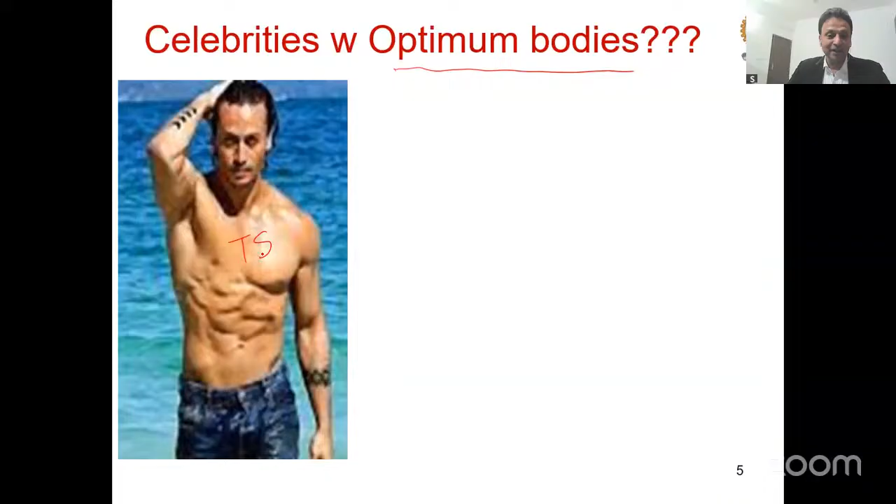So let us say in the beginning you have a heavy structure like this, which is a CNC machine. What I will do is start off with this material or loaded block and take away all the extra material. So extra material from which region? Wherever there is less stress. As you know, material is provided for bearing or resisting stress. So wherever more stress, more material; less stress, less material.

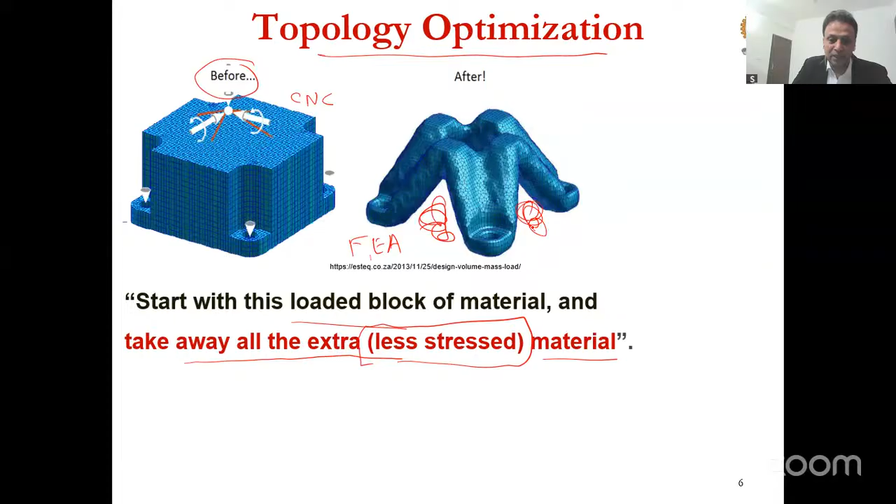So what will happen is I will do finite element analysis, which is a stress analysis technique, and find the stresses. So in this area, you will find that the stresses were low. So therefore, that material has been taken off. Let me give you another analogy, very simple, which I tell in the class also. All of us have these two arms, right? These are like cantilever beams.

Now, a cantilever beam is fixed or supported here and loaded here. But you see the cross section is increasing. And as you know, the maximum bending moment is at the support. Am I right? If I draw the bending moment diagram, if it's a point load, it's going to be W into L, where L is this length. Likewise, what I'm trying to say is, this is God created.

God has made you this way. Where? For example, your thighs have more fat out there, heavy out there.

But as you go down, they are thin. Why? Likewise, if you take a tree, the tree is thicker at the bottom, because all the load and resistance has to be borne at the ground level, and therefore as it goes up, and finally at the leaves, it goes less and less. This is precisely topology optimization.

So one more example I put here. Now let's begin with design. What is design? Basically all of us know design, but when I ask my students to define design, they are somehow not able to. The logic behind design is: find the material, find the size or dimension, or find the form or shape, for any given need.

Whether it is to resist torque or whether it is to resist bending, it all depends on the need. And when we say how do you decide that your need is met, it is when you have that factor of safety met, and that factor of safety is nothing but safety. So your job is done successfully or safely, whatever is the job.

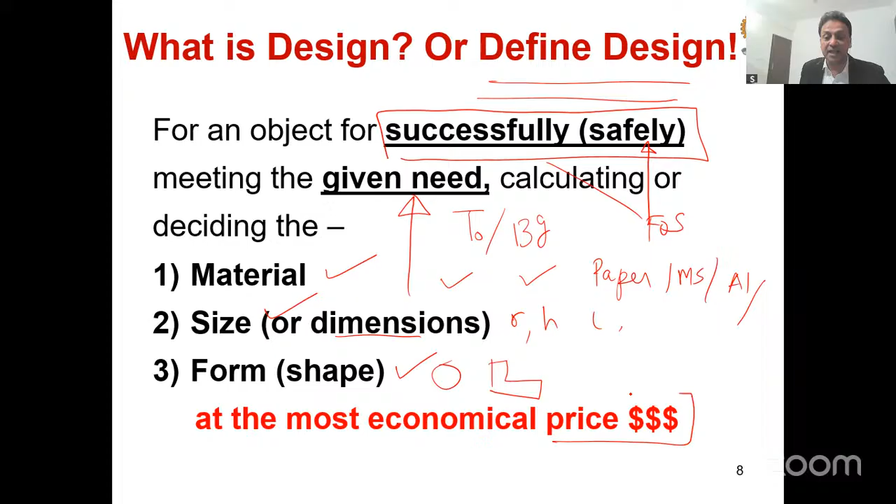And also please remember, your cost of design has to be low, but sometimes designs can be very expensive, so those are futile.

Now design today is all human centric, user based. A simple example, the best example, is your phone. Initially it was meant only to talk, not iPhone, just phone, meant only to chat or talk, just audio. But today the modern phone is all in one. It does calculator and photo and whatnot. I know less than you people.

So ultimately, the design has to be creative. Otherwise it will not survive in the market. You see this Apple versus Samsung, always there is the fight for creative design.

And then we also talk of safety. For example, the battery should not blow. It has to be green and recycling.

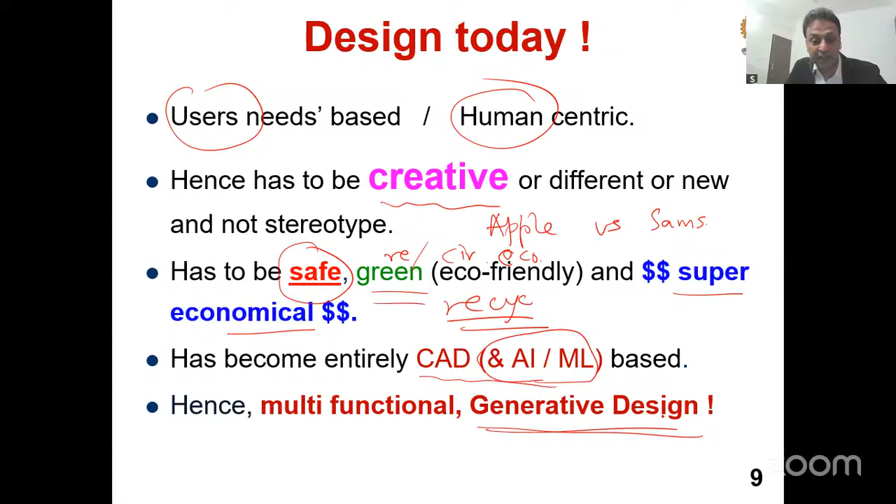Now let's see quickly some applications. The most common examples which you see around are automotive, whether it's a two-wheeler from Ola or Ather, or a four-wheeler from Mahindra, or the Audis and BMWs and all. Brilliant design, the exteriors are super good. I'm going to show you quickly at least 10 or 15 different examples.

Now, furniture, mobile phone, gadgets. In COVID, if you remember, we had masks. Initially they were just like a cloth, but designer masks started coming. So that was the creative part. And when you go for buildings, when you see a beautiful flat or building, you are impressed, etc.

Let's go ahead. So these are some quick snapshots, just please focus on the geometry part, the design part, the creativity part, the use of material, the optimization of it. So some buildings are shown here. That's your green building, where your AC load and light loads can be minimized. Wonderful, exciting area to research on.

You see, these aircrafts cannot carry any dead load. You want them to be as lightweight as possible. So our light combat aircraft, what we call Tejas, the name itself says light. It's a combat aircraft, it has to go fast at the enemy. So therefore you make it light, and you use carbon composites.

And this is a Sukhoi. That black color, have a look at the design part of it. These are stealth aircraft, reconnaissance planes that radar cannot catch, that's what this is.

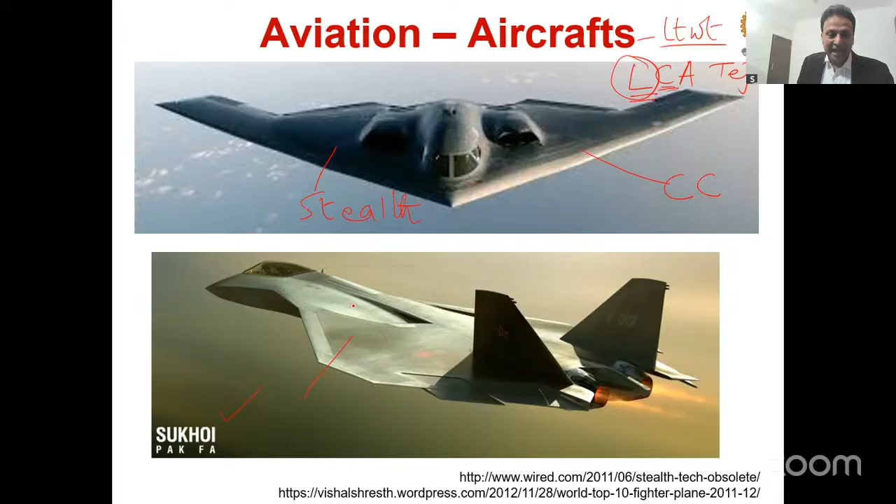And you see that bat-like shape. Okay, and likewise you see the beautiful shape of these Sukhois.

So this is going to be the future concept: lightweight, one or two person helicopter for 40 to 100 miles, going from Prayagraj to say Kanpur or Lucknow. Similarly, you see these cars, beautiful examples, all topology motivated, all lattice motivated, all generative design motivated.

So I'm not going to stick more, but have a look at the designs, those Ferraris and some beautiful motorcycles. This is just to motivate you for thinking differently. Take these cantilever beam designs, for example, the seat design is like a cantilever beam, so you have maximum weight sitting out there, the back person, and yet it is safe to run.

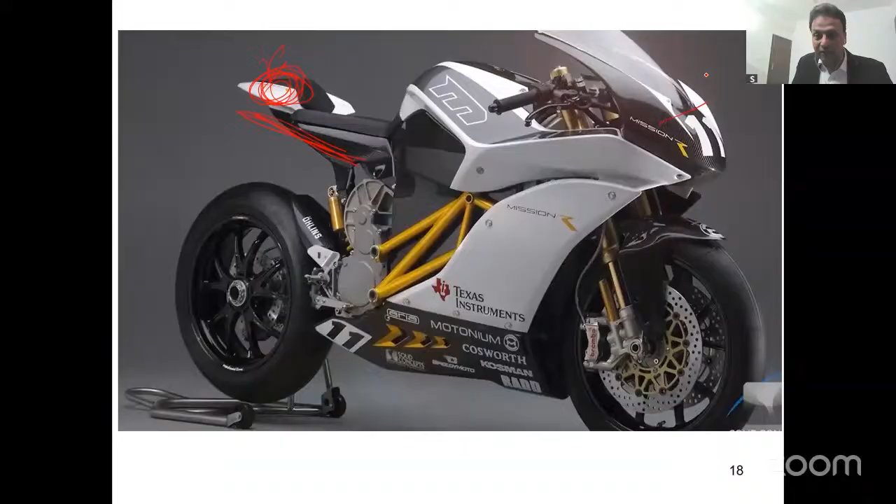And there you have all your carbon fiber composites there and there. Similarly, few more examples of motorcycles, because many of you are youngsters here in the crowd. That's another motorcycle, another, and there an Audi motorcycle.

Wooden bicycles. You see, you go to Netherlands, you see the CEOs and CTOs of different companies, even the president, prime minister of that country, ride bicycles.

And you see, this is like a material. I said design, and design, one of the aspects is material. Now this is wood, but you see the cross section, this is not circular cross section, this is like a rectangular, and if I take a cut, you can get. So that is just like a small project which people can do.

And even in India, this was by a gentleman in Tamil Nadu. He went on to make a wooden bicycle, a bendy bike, for example. Now if you want to travel in train and take this bicycle, there should be an option of bending it and making it half-sized, and so on.

So CAD wise, you can explore all these. Let me quickly show you this just to motivate you further. I'm sure you have seen this Google self-driving bicycle. This is from Google. Let me just show you.

So this is not AI, this is not an AI video, it's an old video.

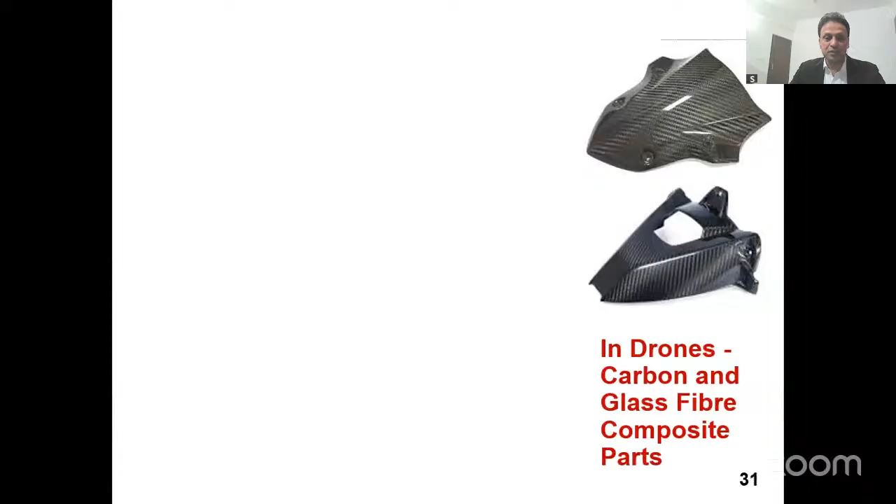So let's proceed. Now Vande Bharat, for example, and drones are using all these carbon glass fibers. So it's all design motivated. Have a look at this.

This lady is using an iron board for ironing clothes, but the same board can be having a mirror at the back. So once you iron your clothes, you quickly drape them and wear them, and see this. So this concept is called multifunctionality. Multifunctionality is nowadays a big thing in design concept.

So let's move on to manufacturing, because I'm ultimately going to cover additive manufacturing. Now people are talking of Industry 4.0 already, and Indian industry is slowly waking up. I was recently at HAL in Bangalore, LCA division, but they have still not adopted it. I was speaking to one of the industry based experts as to whether they are using it, and they said no.

However, the world is advancing very fast. People are even talking of Industry 5.0 and 6.0. I don't know how many of you are aware, I have a couple of slides to cover just to tell you.

Now please remember, Industry 5.0 and 6.0 again are human based, and therefore it has to be flexible. One of the subsets which is used is 3D printing, all of us know, but people are already talking of 4D printing and 5D printing. So may I request all of you to at least catch up on some terms for knowledge sake, rest all is known to you.

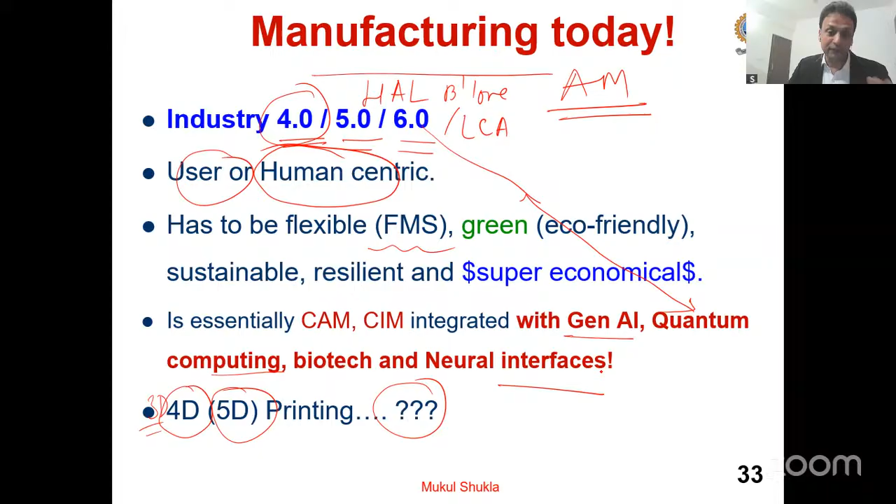Please remember cyber physical systems, all your machines, from design office to the supply chain, are all linked by internet. So that is the commonality. Quickly covering Industry 4.0 elements, you see systems are integrated over the web, IoT is used, cloud, the servers are no more sitting on your desktop.

They are over the cloud - robots, autonomous robots, big data. Data is like wealth today. Loads and loads of data is getting generated, and that is where one of the elements is sitting, additive manufacturing.

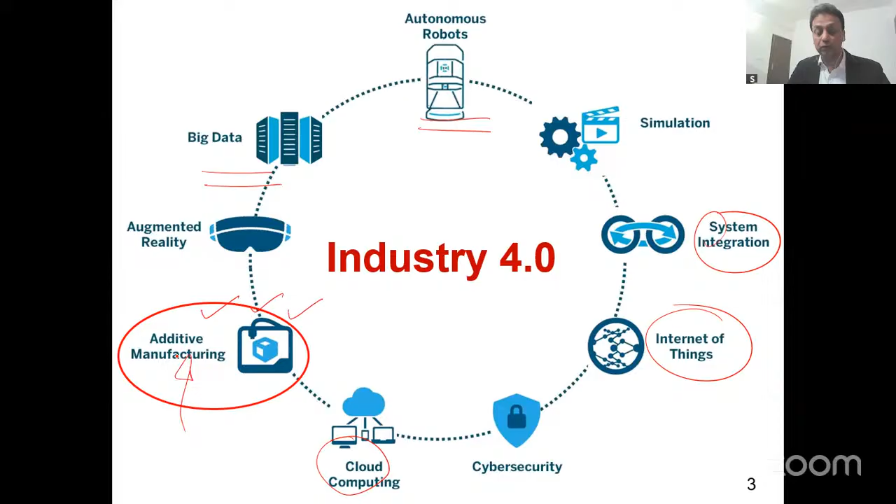More details are already known to you. You may please see - smart factory robotics with additive manufacturing. Industry 5.0, as I said, after COVID, this is human-centered. So I have put a quick difference between Industry 4.0 and 5.0.

Let's see, for example, how many of you are aware of this word called digital twins or cobots? Please write, keep writing in the chat box. I want the chat box to be flooded. Naveen ji, Rakesh ji - yes sir, some of the teachers are writing. Please write, otherwise when we go to the class, we expect the students to interact and speak and be lively, and we teachers too, no matter whether you are on the mobile. Okay, please keep writing.

What I was saying was this circular economy and waste reduction. So you cannot have a technology which is going to pollute your Ganges or Yamuna - not allowed. So Industry 5.0, if a company in Naini is going to adopt Industry 5.0, they just cannot pollute Ganges. Likewise, modular production and the use of AI are always there. So I'm differentiating 4.0 with 5.0, and 6.0 may bring more and more sustainability issues and environmental standards being enforced on the industry.

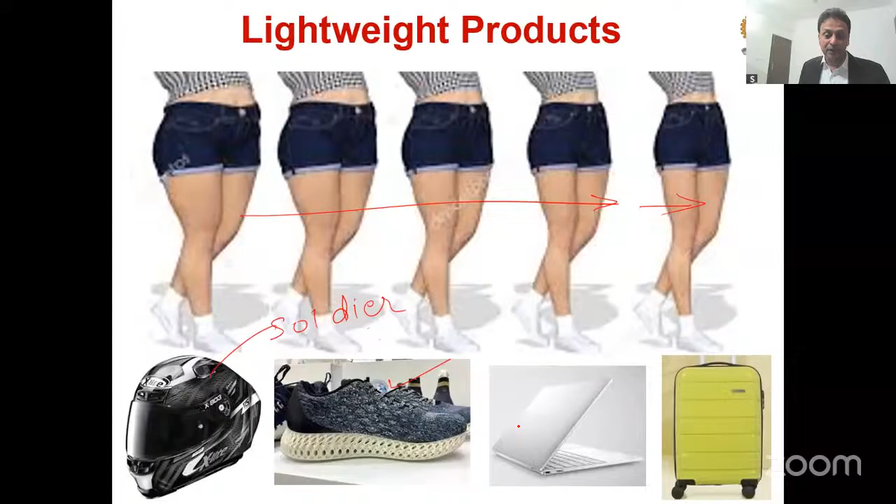So those are examples. Now, when we talk of structural optimization, there are three parts: one is called size optimization, the second is shape, and the third is topology - and this is going to be the talk today. As you know, size - for example, a rectangle whose length and height are there - and I change the L to L1 and H to H1, it becomes a new size. So it is an optimized size.

Likewise, in shape, this is a rectangle and it is made into an ellipse type - that is what we do. For example, a T beam, if it is converted to an L beam or an I beam, is nothing but a change in shape. But we are talking about topology optimization.

Analogy - if you are reducing your weight and dieting and you are lying in bed saying 'sir, I have absolutely no strength now' - that is not allowed. So you have to be equally strong, you have to be more agile, you have to be more efficient.

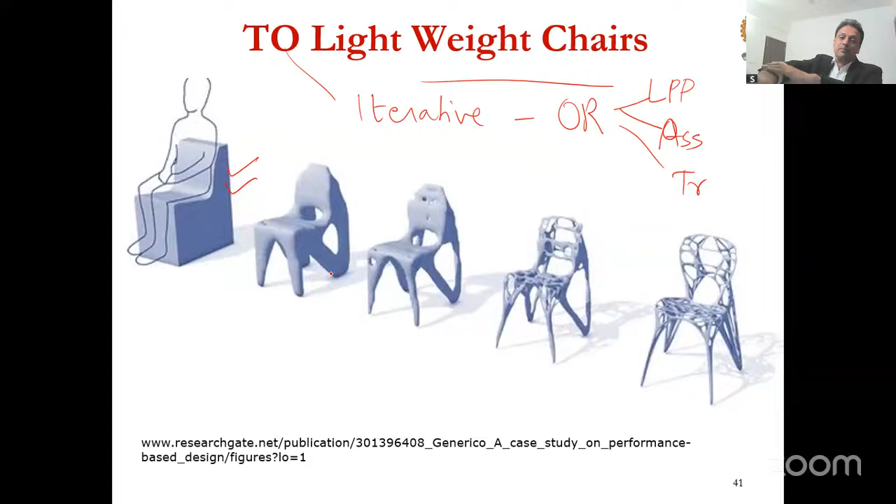If you remember, we used to do the first iteration, then the second, then the third, and then stop somewhere when it converges. So likewise here also, this is my initial chair, which is heavy. Now what I'll do is start taking out material. I'm biting out material from which area? The area which has less stress. I gave you the analogy of my arm. Likewise, you see that all this under-stressed material I'll take out, and next iteration and next and next. So you end up with a sleek design, a wonderful design like this.

And please remember, as I said, functionality. For example, this person who is sitting here safely, maybe the factor of safety of this was 7. It comes down to 5, then 4, then 3, and then 2.6. So this factor of safety should have been above 2.5. The same gentleman who will come and sit here, it will not break. This is the objective of topology optimization. A chair like this, a table and chair like this.

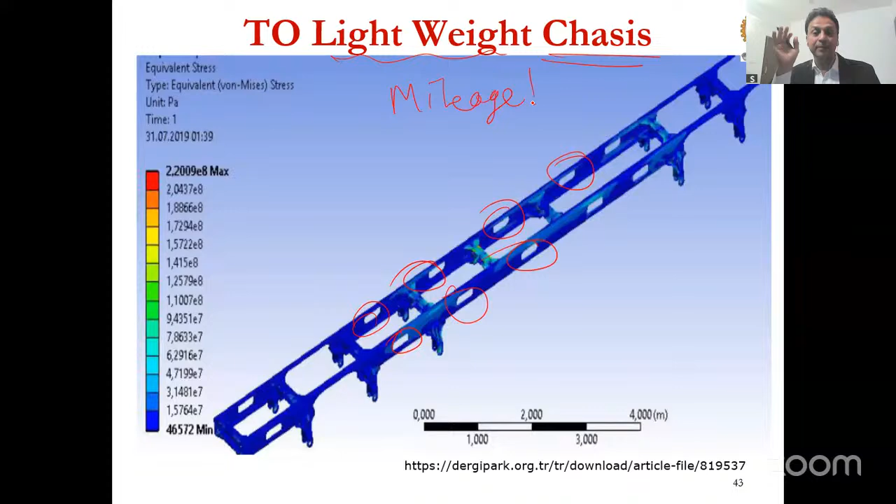For example, chassis. We all see chassis in all automotives, all e-rickshaws and wherever. But you can have those types of cutouts to make it a lightweight chassis. And any lightweight chassis will give more mileage. So this is the motivation of the talk in additive manufacturing. I'm going to tell you why. So those are some examples.

Now, one thing you might have observed from this or this is that the designs, the shapes, are getting pretty complex. So let's see one more application: this is an aircraft. Many of you might have traveled by air. You see, this is like that wing. So you have one wing on one side, there is your fuselage, and the other wing is there. This wing is like a skin basically. You see, this is called skin somewhere here. Yes, skin is written. So the exterior which you see is a composite skin. But skins are not rigid or they are not stiff enough.

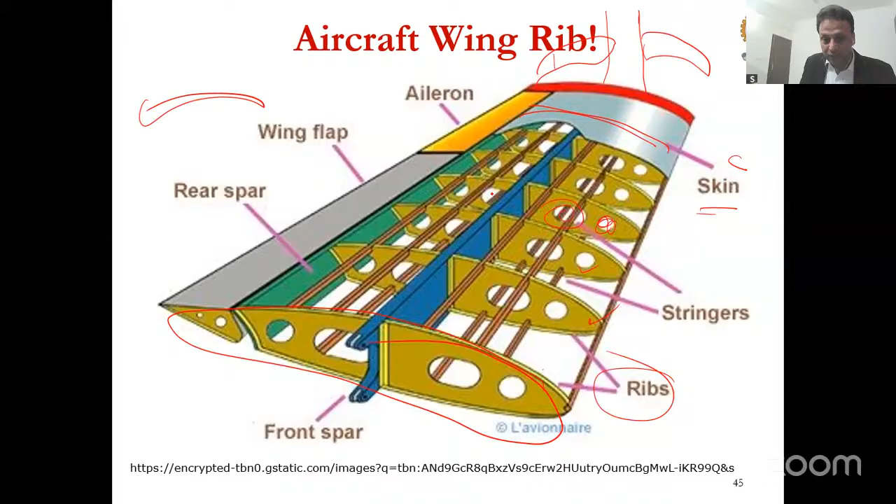So what do we do inside these? We put ribs like these. You see them. And then material is cut out. You see those holes. So this is that example of an aircraft wing rib. Initially what you will have is all solid, full. Then you will start taking out material iteratively, first iteration, second iteration, third, fourth, fifth, sixth. So you will end up with a very light rib. And please remember, its job, providing stiffness to the wing, will not be compromised.

So now let's move on to the nitty-gritty. I'm not going to tell you the mathematics. There's a lot of mathematics behind it. Please remember, as I said, this is finite element based. Many of you might be aware of finite element. So at the heart of it is all a finite element based concept. So now, what is optimization? Many of you do know it. For example, there is a function which has to be either maximized or minimized.

So actually, optimization in real life is what we call jugaad. We learn that jugaad from our own minds or from those around us, right? But in strict mathematical terms, it's going to be a systematic method. For example, you have studied differential calculus. You'll remember: you find the first derivative, equate it to zero, find the second derivative, and the sign, whether it's plus or minus, gives you the minima, isn't it? So it's a systematic process. And there is a constraint also. Let me demonstrate by means of an example what optimization is all about.

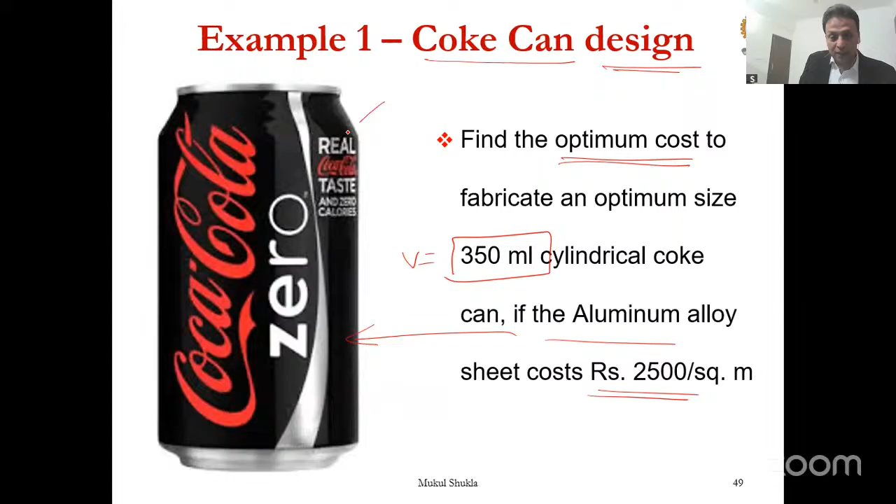So let me demonstrate how it is. As you know, in a cylinder you have two variables, radius and height. So here the height is more, the radius is less, versus this on the right side, the height is less and the radius is more. Please remember, volume has to be constant, 350 ml or 1 liter bottle or 2 liter bottle. It is constant. So let's solve it.

So as I said, the constraint is volume, pi r square h. It's a cylinder. Pi r square h is equal to 350. So h will become 350 upon pi r square. Why I'm doing this is because I want to convert two variables, radius and height, to a single variable problem by substituting it.

And then my objective function, as I told you, is like a sheet metal. You have to bend it like this and use it like a cylinder. So this is the surface area of a cylinder: 2 pi rh for the curved surface, pi r square on top, pi r square at the bottom. So pi r square plus pi r square is 2 pi r square, and 2 pi rh. So that is my surface area.

What is my objective? My objective is to minimize the surface area. What is my constraint? The constraint is volume.

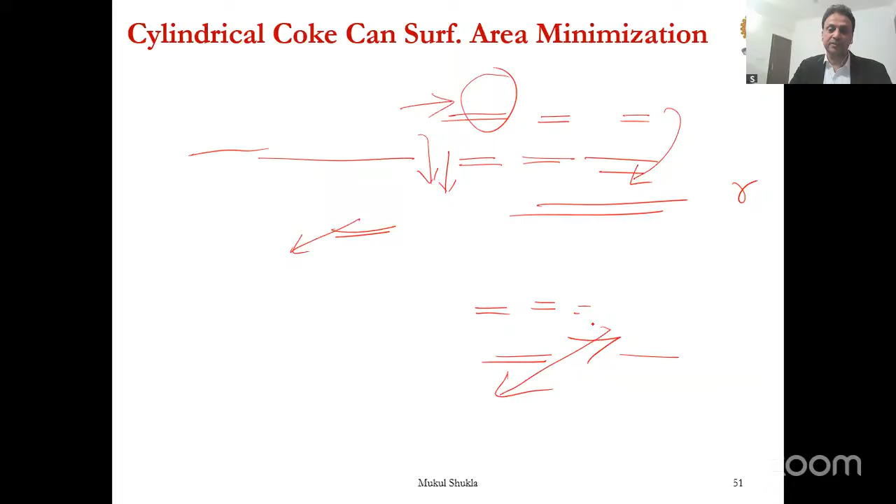But when you plug it back, you will find that the dia and the height are equal. So neither will your design be like this, nor will it be like this. You will in fact get a square shaped can whose height h is equal to dia. So this is that simple optimization exercise which I am trying to showcase.

Why? Because in topology optimization also we will use a constraint. We'll have an objective function. We will have variables. We will not do this differentiation, etc. Instead, we will use the finite element method.

Is it fine so far, Dr. Naveen? Any comments? Yes, sir. Fine. All right. Okay. Right.

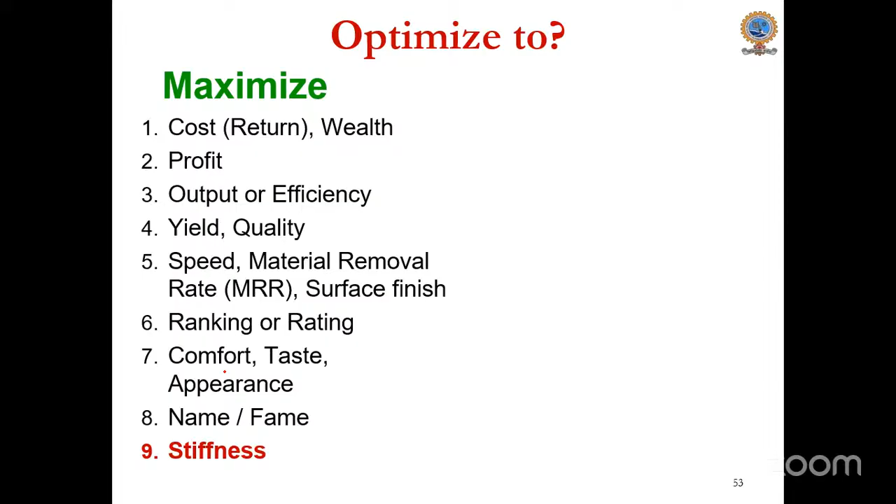Let's move on now. When we talk of optimizing, what do we want to maximize?

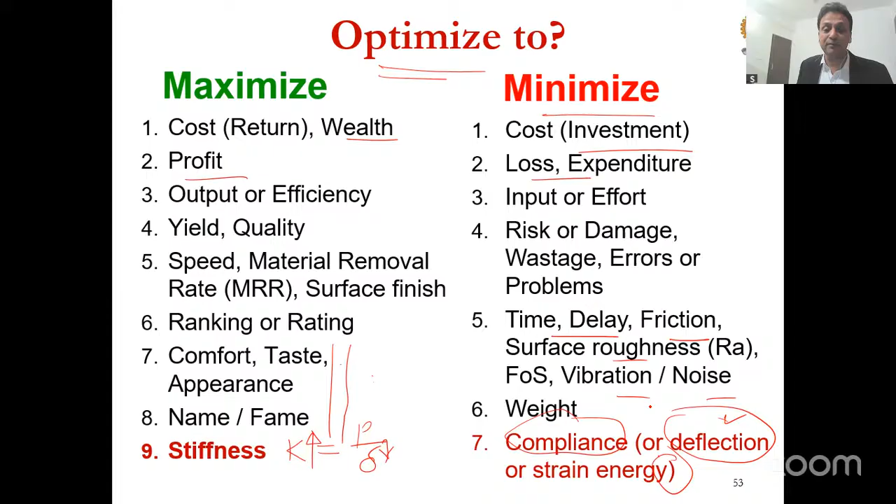So you want to minimize compliance, maximize stiffness. However, we will use the strain energy. Strain energy is the energy under the stress strain diagram, and strain is nothing but deflection. So we want to minimize strain energy. We want to minimize deflection in topology optimization. So I hope you recall this. This is what we will do.

I hope you also recall this, for the benefit of all those of you who joined late, because I can see the ting, ting coming. It means people are still joining.

Okay. Right. So what we are trying to do is make it lightweight. Why? Because it will become multifunctional, cost will reduce, manufacturing will become smart. Now, the obvious question is, how can you make anything lightweight?

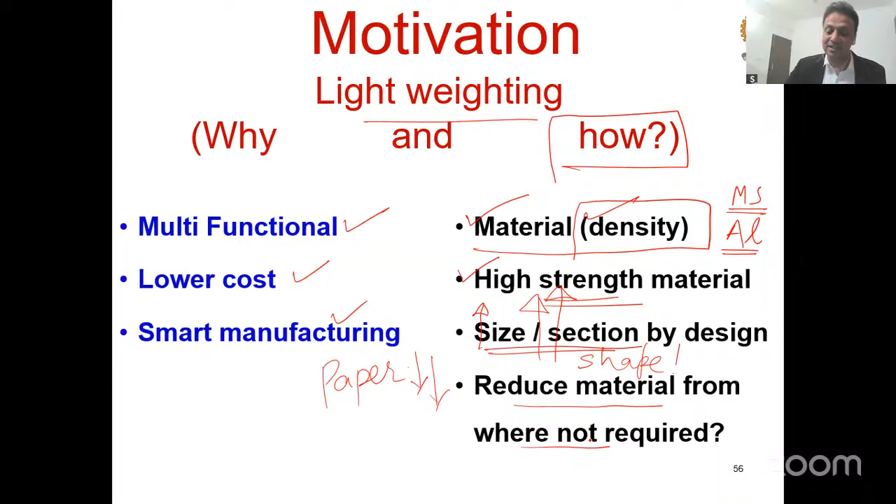Let's see now. Let's go slowly into topology. Now, as I said, I want stiffness to be maximized. I want deflection to be minimized. So let me tell you a simple example of a cantilever beam like this. Now I am dividing it into a 5x2 grid. So I have 5 columns and 2 rows. So it makes it 10 cells, isn't it? 5x2, 10 cells. But I am only allowing you to place 7 cells.

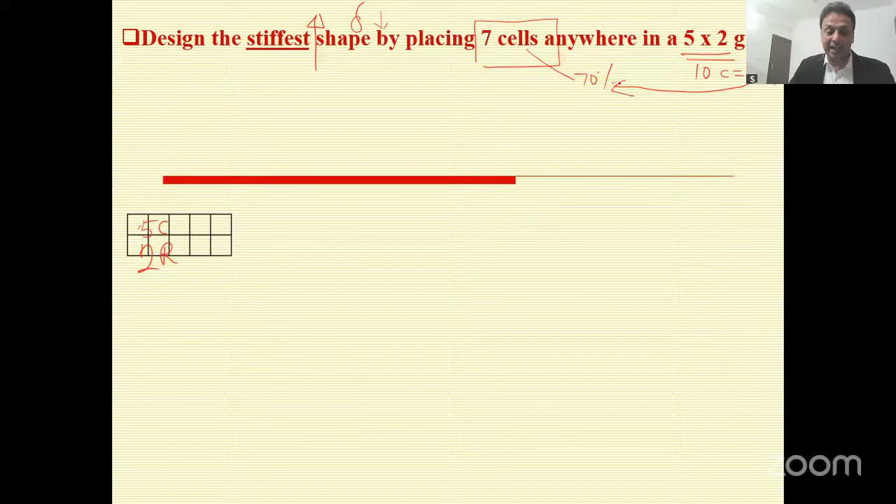Don't worry, it will be clear in the immediate half a minute. I am only giving you 7 cells. What it means is 10 cells is equal to 100% weight, and 7 cells means 70%. So I am reducing my 100% to 70%. But how? Placing the cells wherever you want. So let me start off. When I have 10 cells, I'll have 100% volume, something like this.

See this? Now, when I say reduce the volume or reduce the mass by 30%, from 100, bring it down to 70. So it means instead of 10 cells, I will give you only 7 cells. But the choice you have as a designer is put it in any location, the way you want to locate it. So let me show you. For example, I put 2 on the top and 5 on the bottom. This is one structure. I put 5 on top, 2 on the bottom.

This is another structure. So now if I put a point load there and fix it there roughly, same fixing again here, same point load here, the deflection of this is different, the deflection of this is different. So likewise, placing the material at different places will give you different structure, and when you load it, you will get different stress. So redistribution of mass, redistribution of stress is nothing but topology optimization.

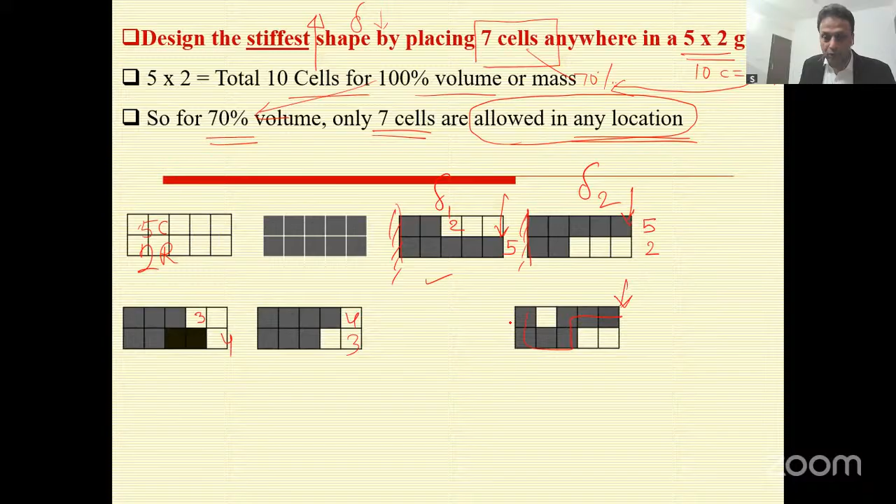Like another example, I can put 3 on top, 4 on bottom, 4 on top, 3 on bottom. So actually, I can have a fancy shape like this also and put the point load there, fix it here. But what it means is I'll have actually 10C7, making 120 possible designs I can make.

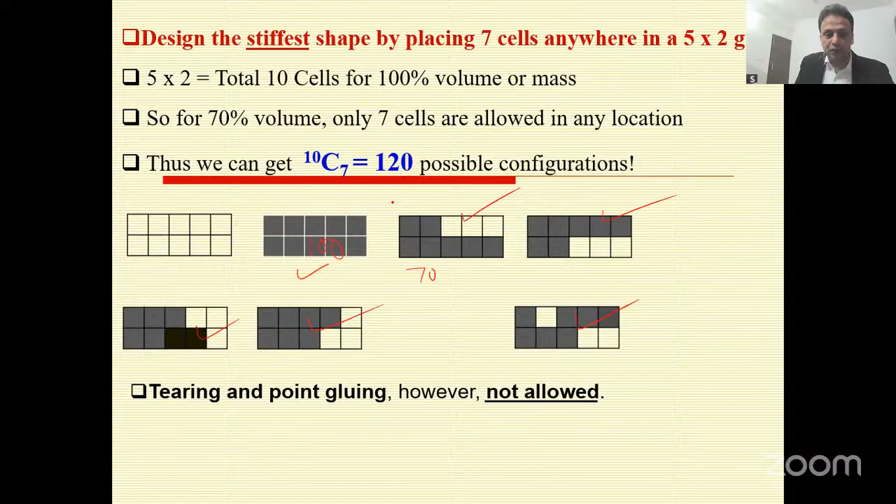But one of them, say number 75, is coming out to be the stiffest. So that is what we have to check for.

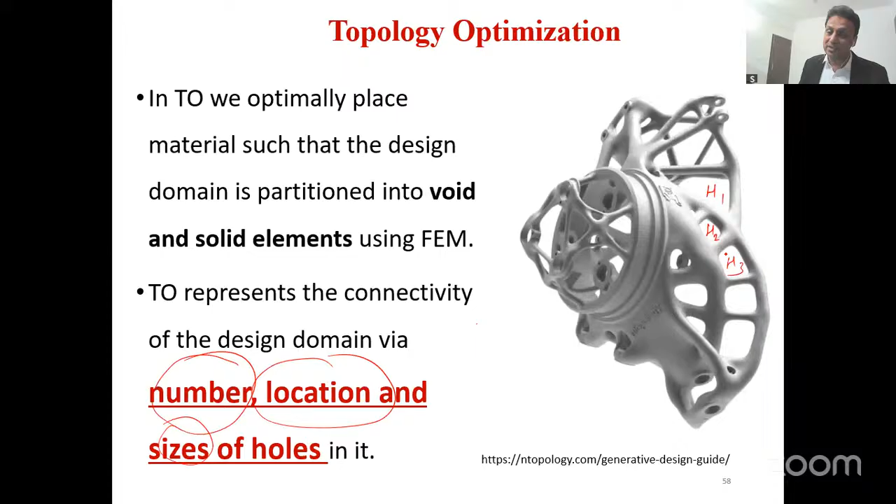अभी मैंने आपको example दिया on a beam, 120 possible configurations. So different topology. This is the meaning of topology. At least all of you should understand what is the meaning of topology. The meaning of topology is basically around connectivity. So how are you connecting one area to another? Say the left part is connected to the rightmost part. How? By these holes. तो कहीं से हटाया, कहीं लगाया. How do you control the number of holes, the location of each hole, and the size of each hole?

Why are we doing finite element? Please tell me, why are we doing finite element? To evaluate the stresses at different points as per the requirement. Absolutely correct. 10 out of 10. Yes, right answer. हमने कहा कि somewhere you have more stress, somewhere you have less stress. But how do you know it? To get an estimate of which of them.

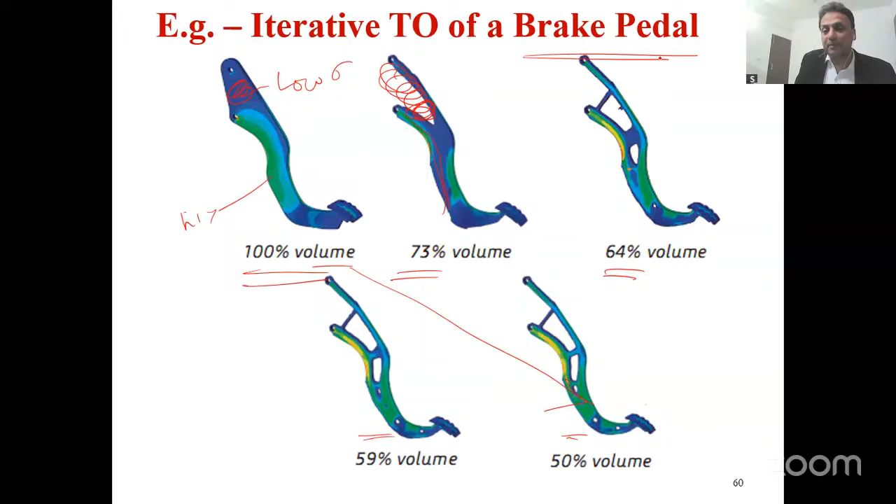And as you can see, what is the advantage of making, why do we want to make brake pedal light? Why do we want to make it light?

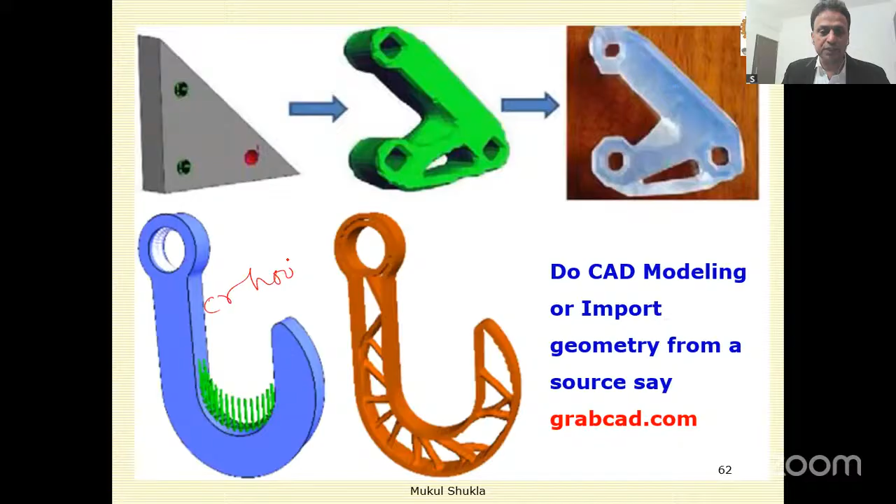I'll skip this. So those are some examples. This is a crane hook. You start off with that, and when you do topology, some shapes are getting generated. So not everything is so easy. The problem is you get some very complex shapes. And please remember, as I said, design on a computer is very easy, but ultimately it has to be manufactured. So all these complex shapes ought to be manufactured. Now, I've shown you some very fancy ones, I'll show you a few more.

Well, they're very difficult to manufacture, whether you have to use welding or casting or CNC machining. It becomes very challenging. So therefore, the savior or rakshak is additive manufacturing. As you know, additive manufacturing is moldless, die-less. You don't need a mold, you don't need a die. If you can conceptualize the design, you can print it. This is the number one advantage of additive manufacturing, that any design, howsoever complex it is, you can manufacture it. So let's see.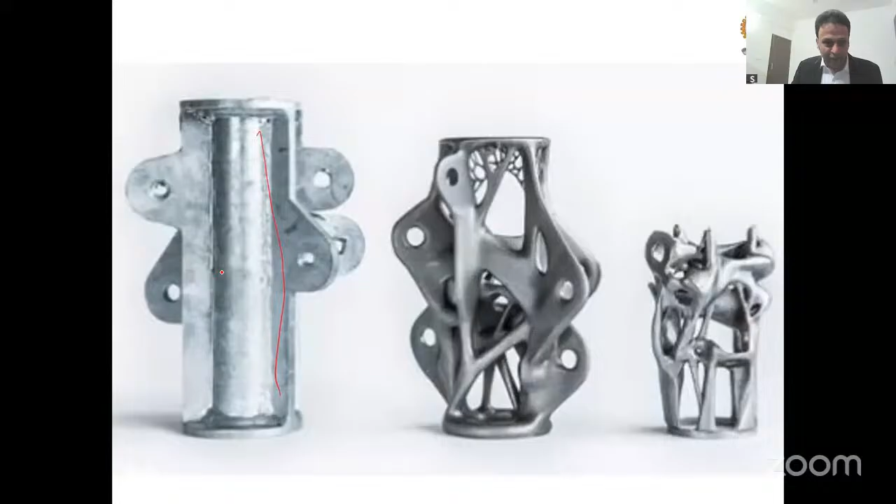For example, this is a classical example which is shown in additive. You browse topology optimization, you will get it. You see, this is brazing or welding done here. So imagine there are 5 parts or 7 parts, but you can additively manufacture it like this. And you can see all those holes cut out there. I told you the location of holes, the size of holes. So such complex designs are easily manufacturable by additive manufacturing. Conventional welding, CNC, or a hybrid technique is not so feasible. So that is one of the major industry-based delays on the adoption of topology optimization.

So slowly people are using it, because, for example, this is made of, say, stainless steel. Now if stainless steel or titanium is there, making it using 3D printing, you need a metal printer. Now, even MNNIT in Allahabad doesn't have a metal printer. So you do a brilliant design, I can do it using Abaqus, but I can't manufacture it. So this is the biggest limitation as of now. You come up with a good design, which is highly lightweight, functionally good, but you're not able to manufacture it.

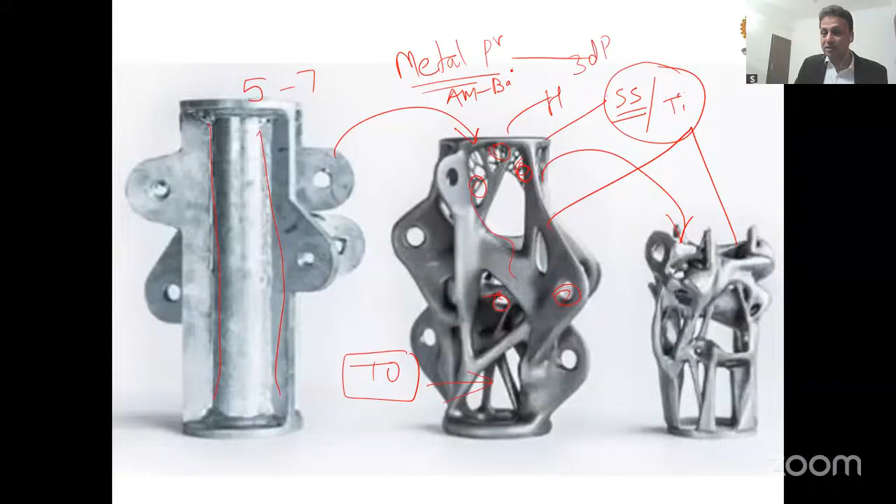And as you also know, additive manufacturing is a batch process. You can't get, say, thousands of products out of additive manufacturing, but this is where the world is going to be. So I'm showcasing some of the examples. This is an exhaust manifold out of metal additive manufacturing, and see the complexity of this object. Another seat bracket.

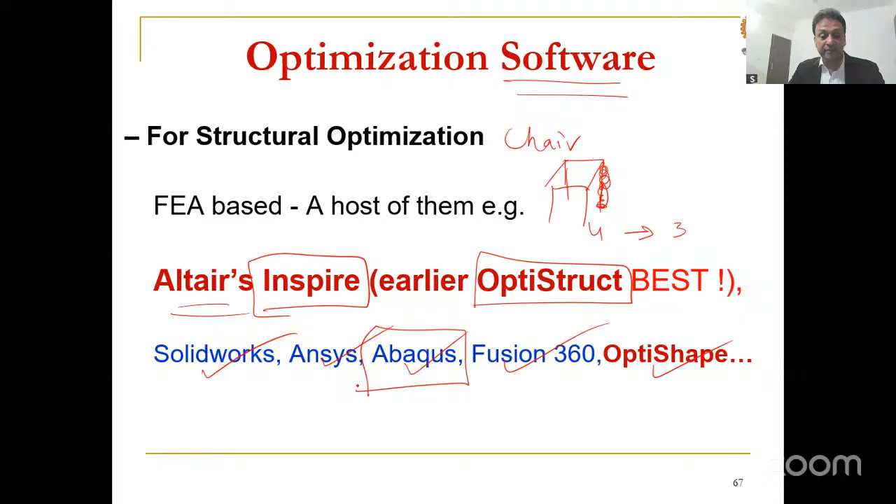Now, as I said, remember the ANSYS brake wheel example? The first thing we did is static FEA. Why? To get an idea of the stress, a trend of the stress. Once you get that, then you start.

Now moving back to this example of a con rod, what I will do is divide it into a design area and a no-design area. This no-design area we also call freeze. What is the meaning of freeze? Freeze means don't disturb. As you know, this is a connecting rod, connected like this. So I will demarcate this big end. What is shown here on this side is the small end - I won't disturb it. I will call it the non-design area or frozen area.

However, this middle portion which you see, I will eat out material from here, to make it lightweight - but from which area? From this central area. So you have to have some idea of your problem. As I gave the example of the four legs, those legs will be made tapered, but they have to be there - at least 4 legs have to be there. So you have to divide your model into design and non-design areas. This will be clear in the later slides also.

So let's now go towards the Abaqus optimization, how you do it. Remember the Coke can example? That's what we'll do here too. We will do topology optimization - shape and size we are not doing, although it is possible. We will have variables, like radius and height were variables in the Coke can problem.

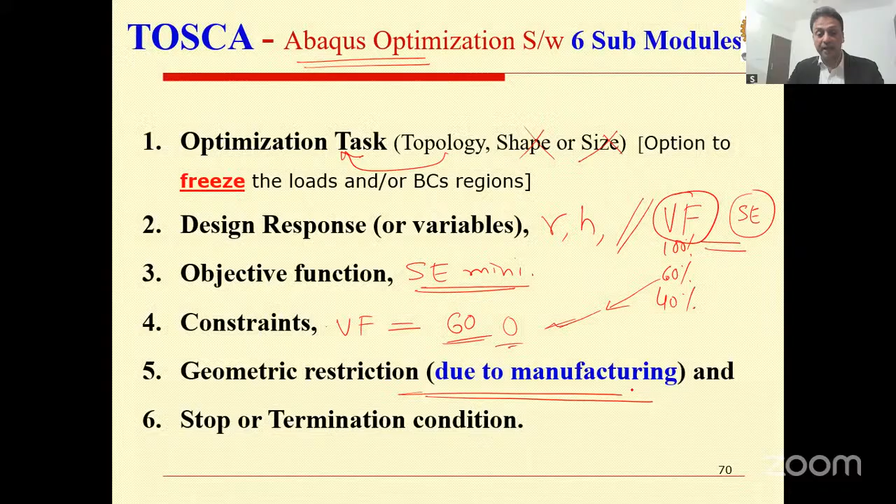Now this is the first example, picked up from that YouTube video from Abaqus. This is like a bridge - the one near Naini that you must have seen. So cars are going from Prayagraj towards Naini. This is that initial shape.

My objective is to minimize deflection for a 30% volume constraint. So what happens is start from 100 and decrease by 70 to come down to 30. You will just now see - brilliant. I also have it, I'll show you.

First thing you need to do is define the design or non-design area. This yellow area you see is where you will take out material. But this green area we have kept as non-design, because if you create potholes here on the road, how will the car run? So that bottom area on which cars or lorries will run, I have kept non-design - don't touch it, the green area at the bottom. However, you are free to play with this other area.

What I'll do is the first step, as you all know by now, is to do static FEA. Why? Because you will get an idea of the stress. The output will be the von Mises stress, and you will get a trend.

Now, as you know, this blue is the minimum stress - see, here there is no stress, here there is no stress. Okay, and you know this is like a simply supported beam - you see this, it is supported here. This is the bridge, it has supports here. So the maximum stress is coming at that red-yellow area.

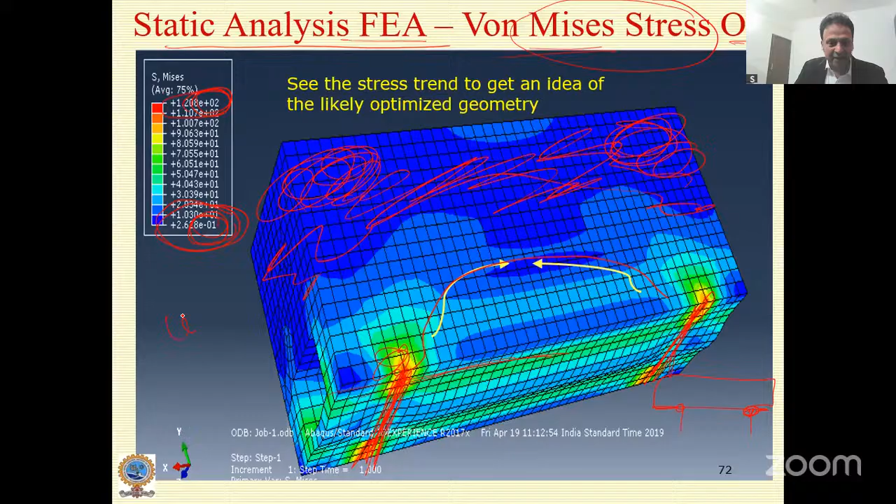So this is the end result. The link is given there - you can see it's a 35 odd minute video. So how did we start off? We started off with a block like that, a heavy block like that.

So this was that non-design area, the bottom road area. You can see there are no cutouts here, no holes here - the road is nice and good. But all the rest is the cutout, all topology - all this area is all eaten up.

All this area, so your 100% becomes 30% over a period of time. Is it clear, guys? Yes sir, it is clear.

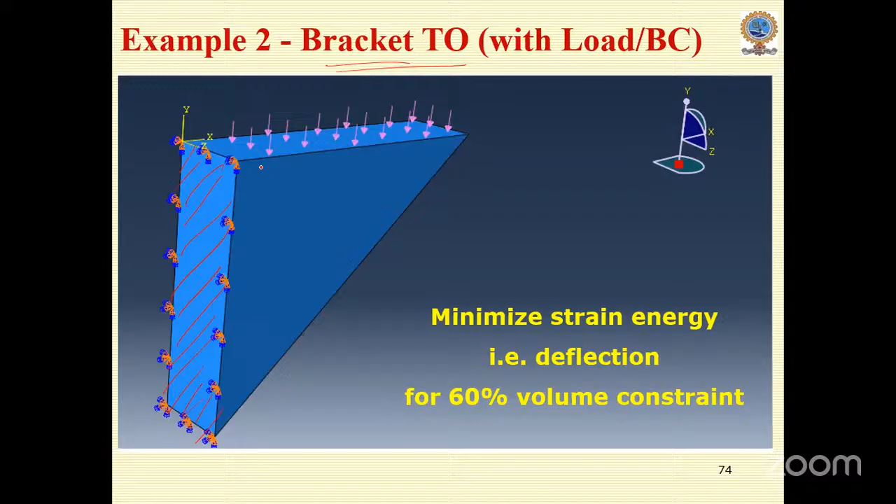Okay, so this is a 3D example I gave you. I'll show you another example. This is a simpler example of a bracket. I'll demonstrate two examples. So now this is like a bracket which is fixed on the left end, fixed in a way. And I'm having load, like a pressure load on the top here.

What is the objective? The objective is to minimize the strain energy, meaning minimize deflection. What is the constraint? The constraint is 60% volume. So you are bringing it down from 100 to 60. It means 40% you are reducing. I'll show you this later on.

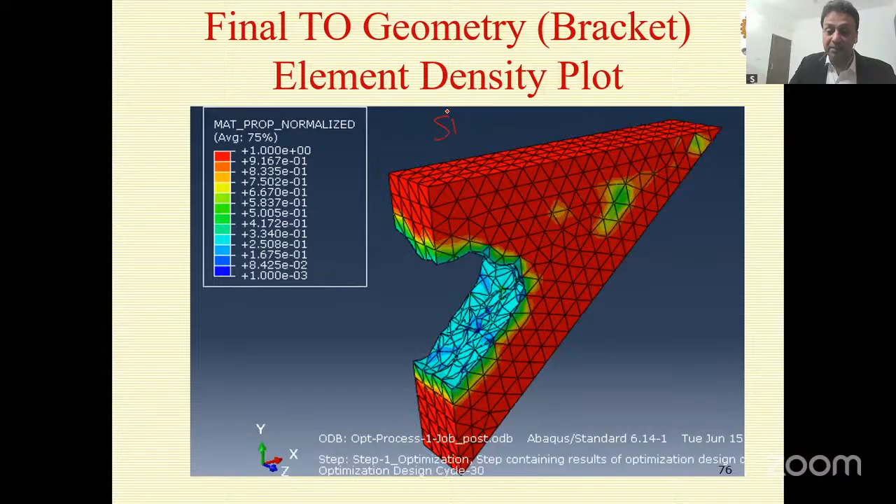And why do we use finite element? As the name suggests, finite element, so it has small pieces. These are elements, these are tetrahedral elements. The topology optimization I'll demonstrate will slowly go on eating or removing elements. It will go on removing elements, and that is the beauty of topology. So ultimately, you will get a lightweight structure which is topology optimized.

And please remember, the factor of safety is not violated. Okay, so yeah, like that. So here also, yes, same I told you. Now, as I said, when we do this, what happens is you start with your Conrod example. You start off with this. Now, what happens is you get some very funny shape.

You know, like a chicken's leg, that type of shape. But this won't work, this can't be manufactured. What you have to do is some cleaning, and then you see those shapes are coming randomly. So what you will have to do is some sort of alignment or cleaning in CAD, so that it has to be manufacturable.

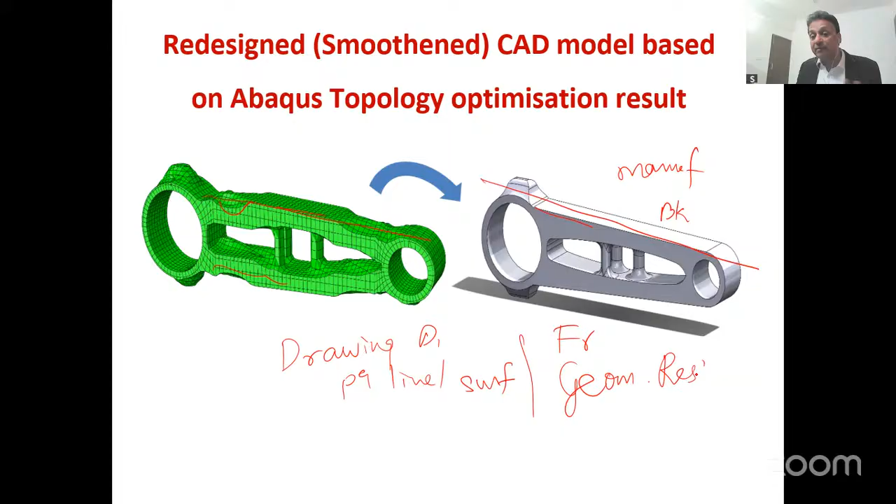And please also remember, I'll tell you later on, you need symmetry. For example, the front and back, the front part and the back part of this. Somebody asked me rightly, what about the stability? So manufacturability, like for example, all the manufacturing engineers know, for example, drawing direction or parting line, parting surface. So these are what are called geometric restrictions, which I'm going to cover later on. When you enforce geometric restrictions, when you enforce frequency to not match, then what happens is you get a shape which will be practical to use.

We'll do this, and then we will solve again. We'll do one more validation. So this was that example. So your small end, it's a non-design area. It was not disturbed, but all this central area was eaten up slowly, bit by bit. Yeah, like there you can see this area is all gone.

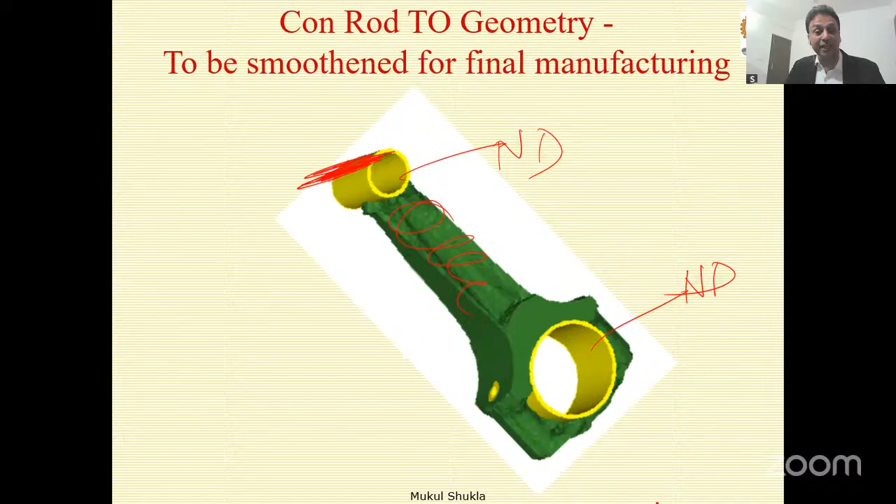So yellow is my non-design, yellow is big and non-design. If you cut from here, if you cut like this, then the connecting rod will fail, it won't function. So please remember, do not make it non-functional. Otherwise your topology optimization is all useless. Let me quickly cover this and then we'll move to the demo.

Manufacturing constraints. For example, I was just talking of the drawing direction. In casting, if you have to draw it out, it has to be reducing in that direction. Sorry, it has to be like this. So you can take this out. Reducing means reducing in the opposite direction. But if it is the other way round, you cannot draw it. Okay. So whether it is extrusion direction or draw direction.

Likewise, for example, we talk of what is called symmetry. I just mentioned the front symmetry with the back symmetry. Sometimes you need a part, for example, like say this, over the pitch circle diameter, if you have 4 holes, they are all symmetrically placed at 90 degree, or at 45 degree like that.

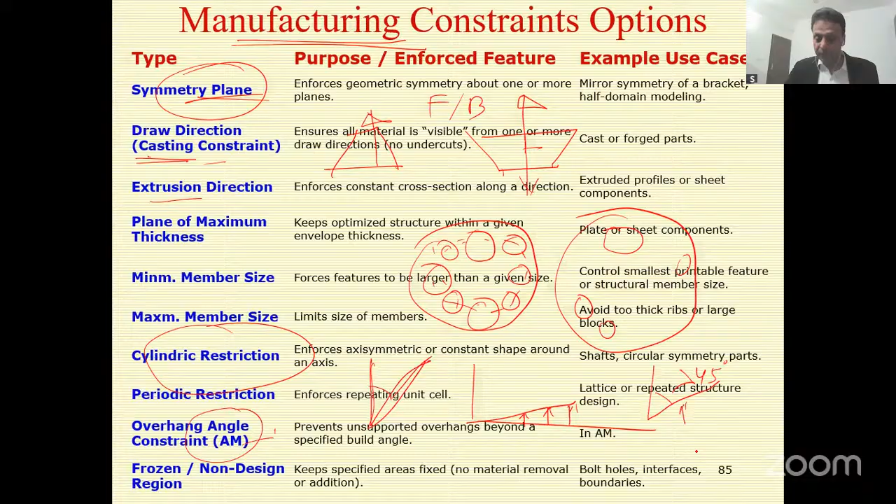So the overhang angle, this is called the overhang angle. So I can specify: make a shape which does not have an angle greater than 45 degree. Otherwise, your design is fine, but its manufacturability is poor. Okay.

So time is now running short. Let me skip all this. This is generative design. There's no time. 7:10. I need to demonstrate also. We will talk sometime later. Generative design. Please make a note of this word called GD. As you know, Gen AI, likewise Gen design is also coming.

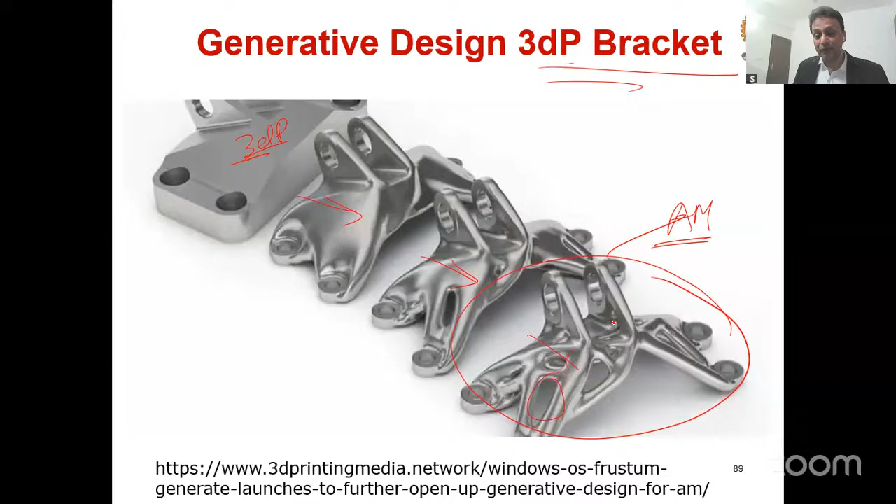So this is the most popular example of a 3D printed bracket. Normally your bracket is heavy, but iteratively you design and you end up with a very optimized design which can only be 3D printed or additively manufactured. It's very difficult to do CNC machining of these. As such, CNC machining is a subtractive process. A lot of chips are wasted. So why not additively manufacture? So this I'll skip. And you will have something like this.

Now another thing. So 3 things I'm telling you today. First is topology optimization. Second is generative design, which I'm not covering in detail. And the third is called lattice designs. We as engineers are familiar with the lattices in material science, whether BCC, FCC, or hexagonal close packed. Basically, the arrangement of atoms in space was nothing but lattices.

So here also what we do is the arrangement of material. This is like a conrod type of a thing. Your big end, your small end, different shape. But you see, material is taken out. So what we do is we create holes, but with different shapes. So plenty of examples I have here. No time to cover all of them, but I wanted to cover the name of the software.

This is a freely downloadable software called nTopology. So what is being made with it? For example, I have an example of this on the left side here. This is actually an implant. I wonder if you are able to see. I have plenty of examples in metal and all, but obviously it becomes very difficult to show in online mode. Yes. So I was talking of this.

This is nothing but a hip joint. In our hip, you have like this. So this is that katori, a bowl type of a thing, and you have a stem like this. So this hip joint is like a ball and socket joint. This is made additively. And you will see here, this is a very rough surface. I wonder if you are able to see. It's a very rough surface.

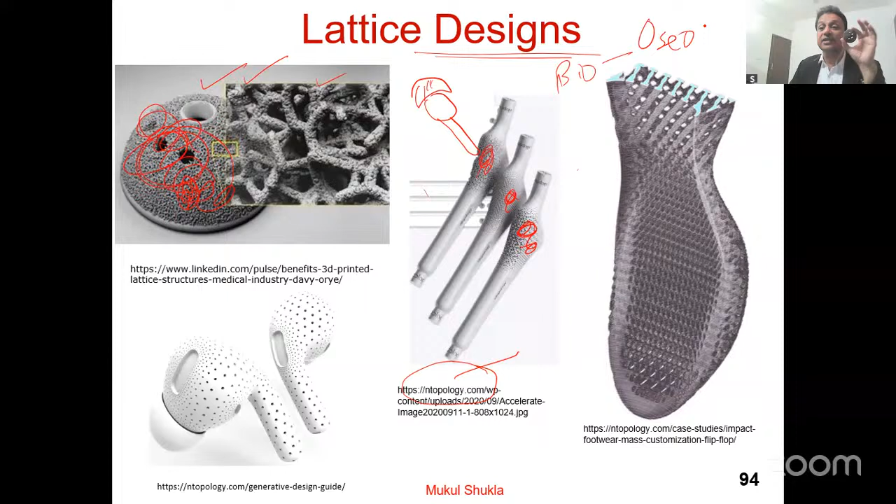What is called osseointegration? So this is a foreign body, it's a metallic thing, and inside, your bones are not metals, they are ceramics, and they are much less stronger. And this is loha lat type की चीज है, उसमें डाला है, it has to integrate. So sometimes the doctor is forced to do a second surgery, saying that the body did not accept. So that's the reason. Yes, the growth of the cells. So हड्डी जुड़नी चाहिए, or the body has to assimilate.

Yes. So likewise, this is an example of a flip flop or a shoe. होता क्या है, as you know, when we walk, we have different patterns. So somebody might be, थोड़ा देखा होगा जूता एक तरफ से घिस जाता है, तो जहां पे ज्यादा लोड आ रहा है वहां पे ऐसा डिजाइन करिए कि वहां से घिसे नहीं.

तो होता क्या, problem is, your gait pattern, the way you walk, ऐसे ऐसे walk कर रहे हैं, that you have to capture and design your shoe sole accordingly. And please remember, ये holes कटे जो हैं, these are all lattices. All right. nTopology is the software. There you can all see it. So those are my lattice designs, etc. The example is given here.

Better see here. I was just talking of that ball and socket. So that thing which I showed you is sitting here, and this is the inner thing. And as you know, our bones are all very porous. Now, if you want to do a bone modeling, many of you are into biomodeling, अब आप इसका देखेंगे, this is not a solid, ladies and gentlemen. You have to model it with what is called pores.

So a healthy bone will have some pores, and when you have osteoporosis, at my age, say 57, 58, 60, 65, the density of this material goes down, the pores become big. These are small pores, these are big pores. The strength of that goes down. Now, if you want to do the modeling, you will have to use lattice designs. Okay, time is a bit less. Use क्या करते हैं, ये सब use करते हैं.

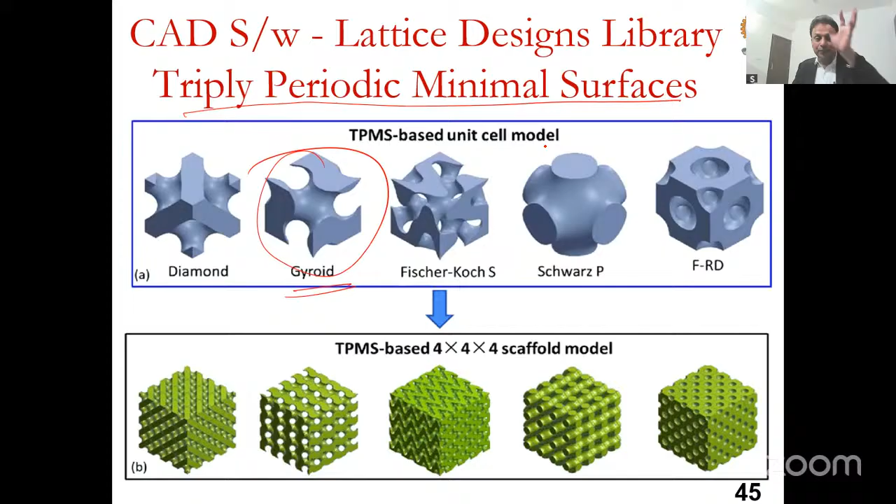देखिए gyroid. So gyroid is that shape which is a TPMS, triply periodic minimal surface, and the fluid will go. So your bones are not through and through. I think I had some example. Yeah, you see, this example is a through and through hole. Whereas this is gyroid, you can't see through and through.

It's like intertwined, ऐसे ऐसे करके जाता है, और यही पेड़ों में होता है, यही bone में होता है. So in trees, the fluids are sucked from the earth and go to the farthest corner. How? By this gyroid structure. So wood is the best example. So yeah, time is less. Let's move to the last part.

15 minutes for me. Because I need to also tell you where are some good sources. So those are the sources. This is that book by Bendsøe, which is wonderful in topology optimization terms. All the basics are given, slightly advanced, but Abaqus topology optimization, I remember I spoke of the bridge. You can see them there. And conrod also I mentioned.

So plenty of papers are published, but they are all very predatory journals. This is not research, please remember. Conrod example, which we do in final year level or MTech level in optimization. So you can teach this topology optimization in additive manufacturing course, in FEM course, and in optimization course. These are the courses which I lecture, और तीनों में ये करवाता हूँ as a project.

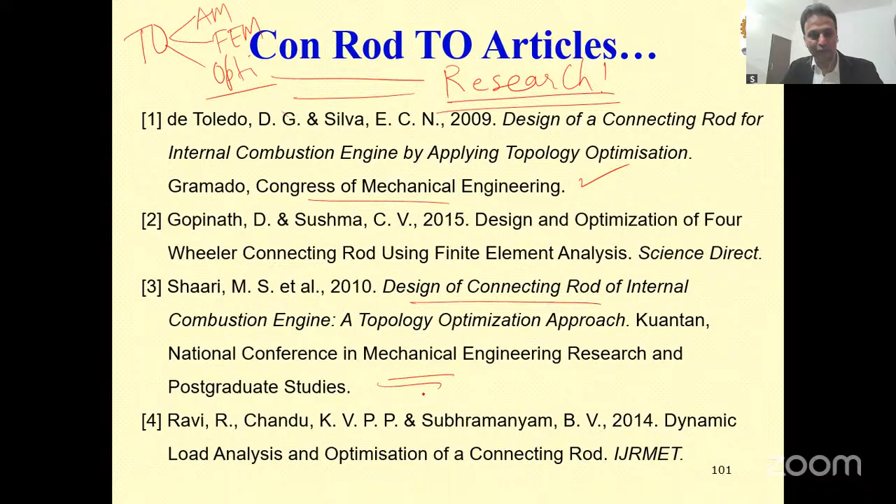Okay, so this is no great research, but there are some articles in Congress of Mechanical Engineering, ये हल्के फुल्के जर्नलों में छपा हुआ है. Right, let me show you an example which we did. This is a fashionable plaster, and as you can see, this is used for the wrist. So wrist cast, this is by one of my MTech students, Mohammad Ahad Islam. He did it in 2020 and we went on to patent it, and it's a granted patent.

So what we did was we made one for a wrist fracture. Your wrists often get fractured. The moment you land, suddenly you put your hand. Naturally, we tend to put our hand and your wrists get fractured. And the conventional way of plastering it is using that chunawala white thing, the heavy one, the itchy one.

So that was the motivation of the work, and I have it here in front of me. I can show it to you. This is 3D printed, and those holes are all topology optimized, in PLA material with the Velcro. So if I put my wrist here, it will be acting like a cast. Although, well, doctors still rely on that.

However, we start off with reverse engineering or scanning of my wrist. So the patient who has the fracture can be quickly scanned. It's hardly a 10 minute job. And once you have the point cloud, as you know, in reverse engineering, you get point clouds, millions of points. Those points can be fitted into surfaces, and those surfaces can then be printed using a 3D printer. Like there, you can print it.

You can also, before this, do what is called topology optimization. So taking those holes out, you see. Now what I said, topology optimization, focus on holes. Some of the holes are big, some of the holes are in different shapes. Their location is all different, their size is all different. So size, number, and location of holes is nothing but topology optimization. And that's what we did here.

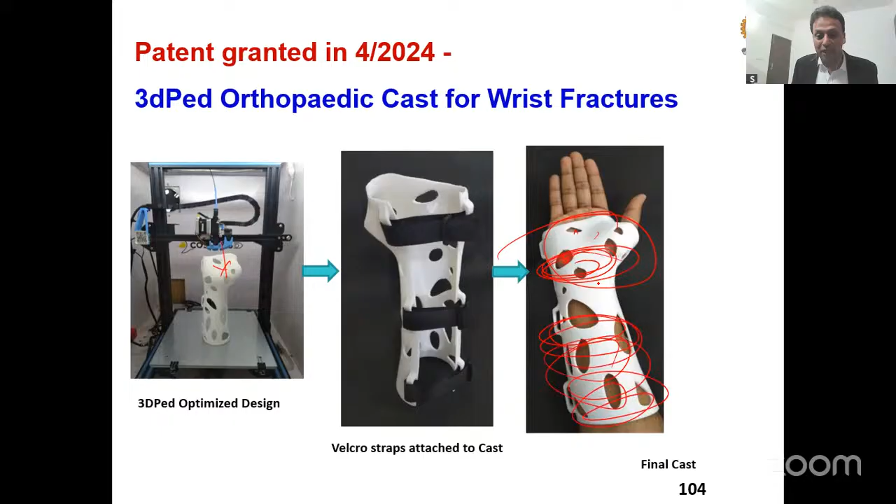The only load has to come around the wrist area, which has to be stiff and rigid. So that was one. So yes, we are going towards the end and the demo. Any ideas clicking, by the way? Where can you use it? Please write it in the chat box. Where can you possibly apply topology optimization using additive in your research or in your projects, in your student projects?

Yeah. So this is that last thing.

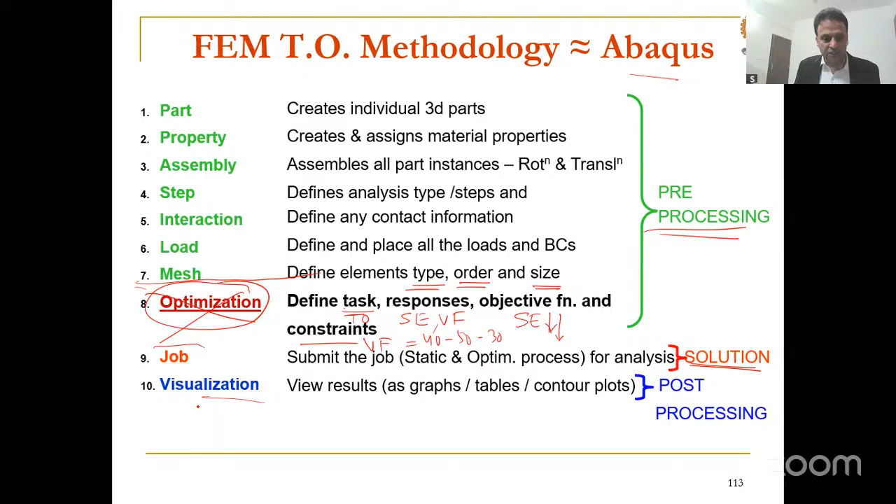Agar optimization nahi karna hai, normal static analysis, you don't do optimization. And then this red is nothing but the solution, the second phase. Once the solution is nice and good, you are happy with the results, you can do what is called visualization. Graphs dekh sakte, tables dekh sakte, etc. So what I'll do is I'll move over to Abaqus.

Okay. Is it visible, Dr. Wayne? Yes, sir, it's visible. Okay.

So you see, this is how Abaqus is decked up. You see part, property, step, load, mesh, optimization, job, visualization. So let's begin with part. So this is that example I'll show you. So you remember this example I showed you?

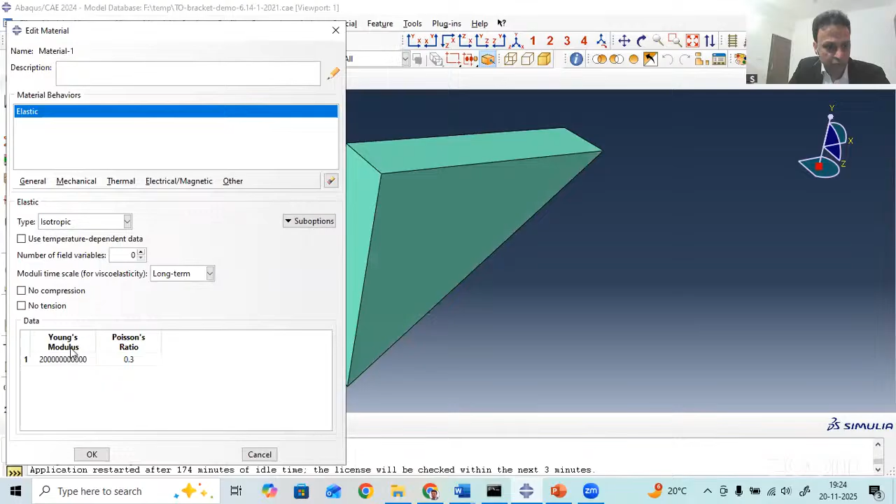Where what I had done was I had applied load on the top there, UDL. I will show it to you also, and boundary conditions. So this is that original part. Okay. So let's go to property. Property is there, edit it, I'll show it to you. So Young's modulus I have defined as 200 GPa and the Poisson's ratio is 0.3. Please remember this is static analysis. Very, very easy.

So we'll come to step. As I said, the step is static general, so static analysis. What can we do in step? The type of analysis, dynamic analysis karna, to yahan pe chunte hain aap. Okay, we are doing static analysis, and then let me show you the next thing, which is load. I'll edit it. So this is the top surface.

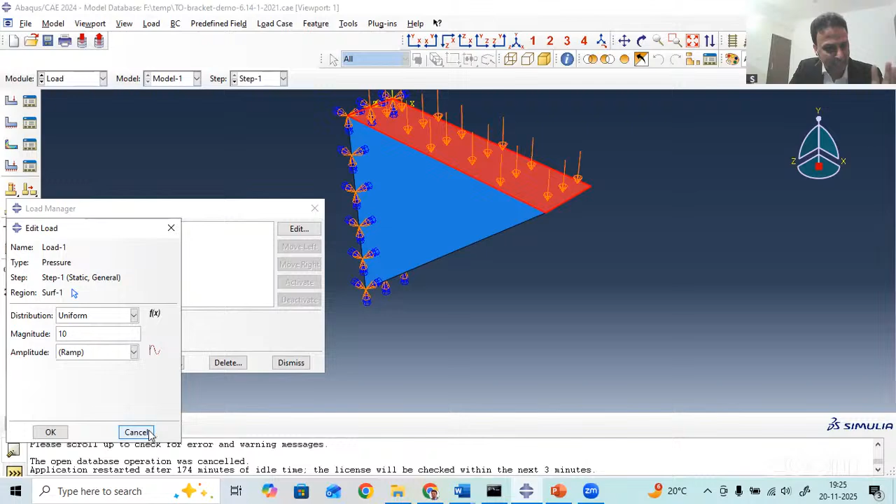I have put a load, which type of load? You see that pressure is the load. The value is 10. Okay, don't worry about the units. Don't worry about the magnitude. Just focus on the basic concept. So that is my load, and then I will rotate it and show it to you here. Yes, and then I'll show you the boundary condition.

This is the boundary condition manager. I'll click it and show you this. So this is the boundary condition. What is the boundary condition? You see, it's called Encastre. Encastre means fixed. Fixed mein kya hota hai? The 6 degrees of freedom at a point are curtailed or controlled. So the 3 displacements in XYZ and the 3 rotations along XYZ axis are all curtailed.

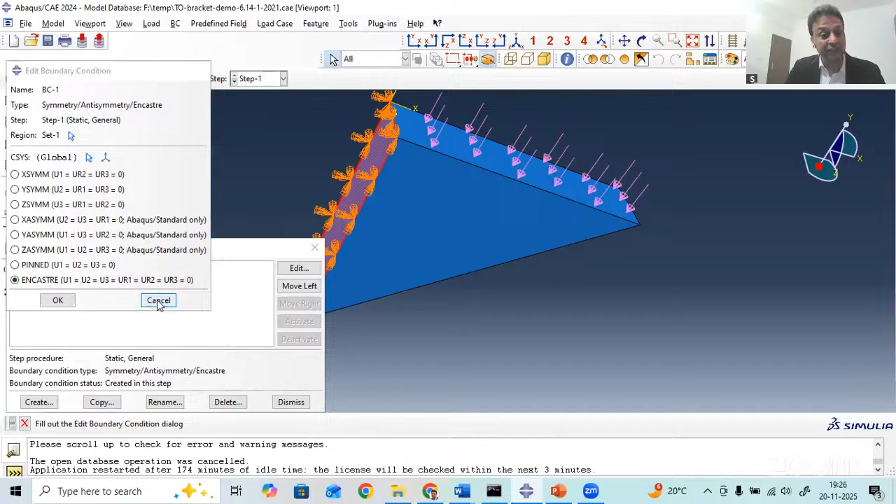You all know basic strength of materials. What's the fixed beam, what is the overhang, what's the simply supported. If I want to pin it, I can pin it there. If I want to fix it, etc. So this is boundary condition. What did we start with? Part, property, step, load, mesh. Let's see mesh now. So that's my mesh there. I can just zoom it a bit.

Have a look, ladies and gentlemen. This is a TET mesh because the problem is 3D. Had it been 2D, we could have worked with triangles. This is 3D, so the mesh is TET mesh. Although this is a very fine mesh here. So what? Please remember, low stress area se wo khana shuru kar de.

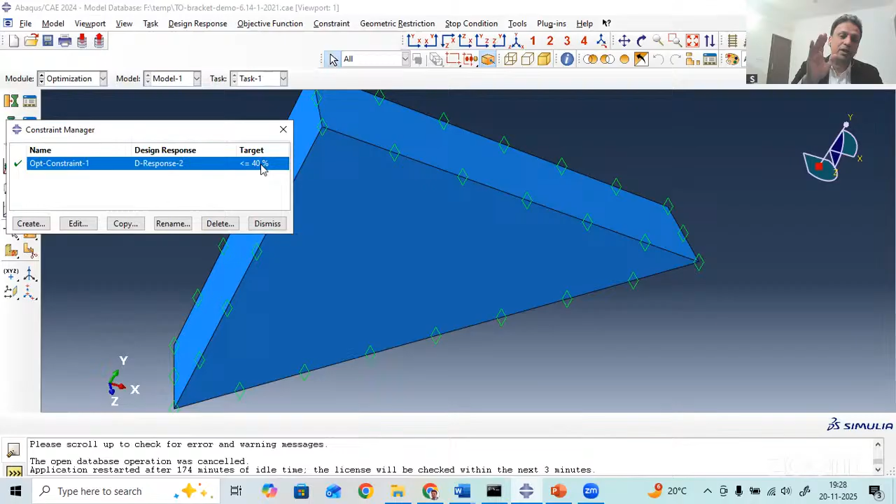And the fourth, last thing, is called constraint. So what is the constraint? The second design response is called volume fraction. Our target is 40%. So start with 100, bring down to 40. It means reduce by 60. I have already solved it. First I'll show you the results of static FEA. Why static FEA? To get a trend of this stress.

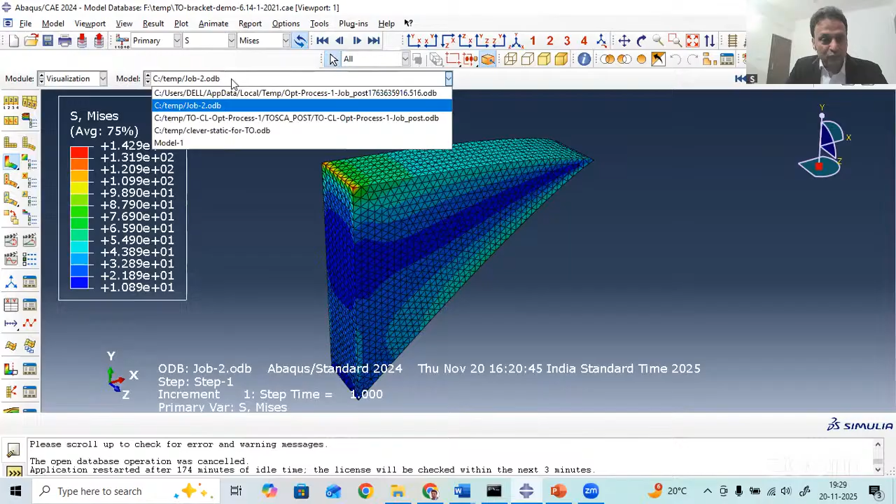Let me show you the optimization results also. I have already made it ready. So this is my original shape. Here I have reduced the element density slightly. There were a lot of tet elements here, but just for the sake of quick solution, I have reduced the number of elements. So this is my original thing, and now what I will do is start. You see.

At the bottom you will see cycles. This is second cycle, third cycle, fourth cycle, fifth cycle, sixth cycle. Can you see, ladies and gentlemen, slowly the material is getting reduced? Can you see? Hello? Yes, sir.

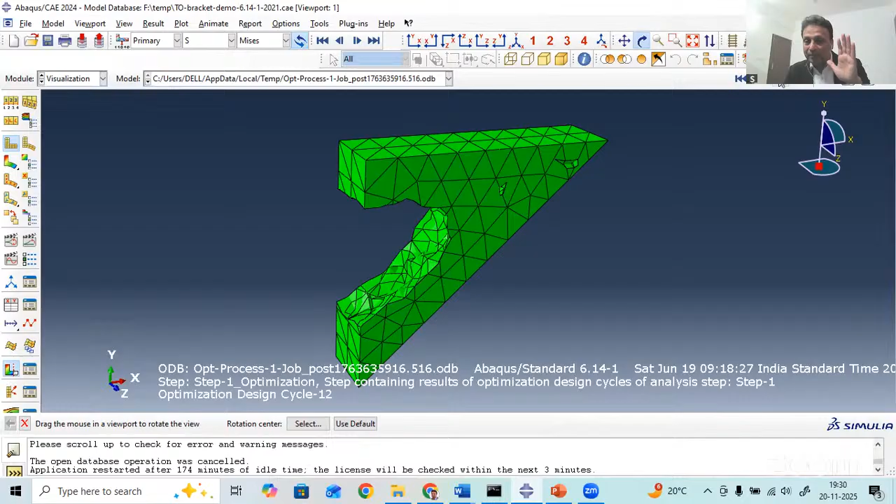I showed you the stress trend. On the left side, it was minimum. Blue area was minimum. It is not disturbing the top area. So I will go on doing the bottom. At the bottom, you can see currently I have 20 cycles. So this is iteration. Topology optimization is going on and on until it will touch 40%.

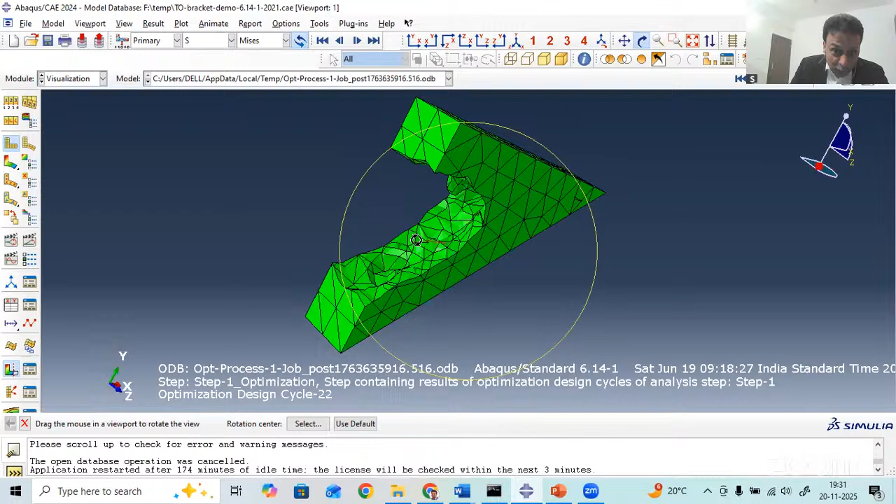From the front, it is like this, but it doesn't matter what is in the front. You also need total volume. So you started with 100 and you came down to 60. Almost 40%, big areas inside also went. So this is that example of topology optimization.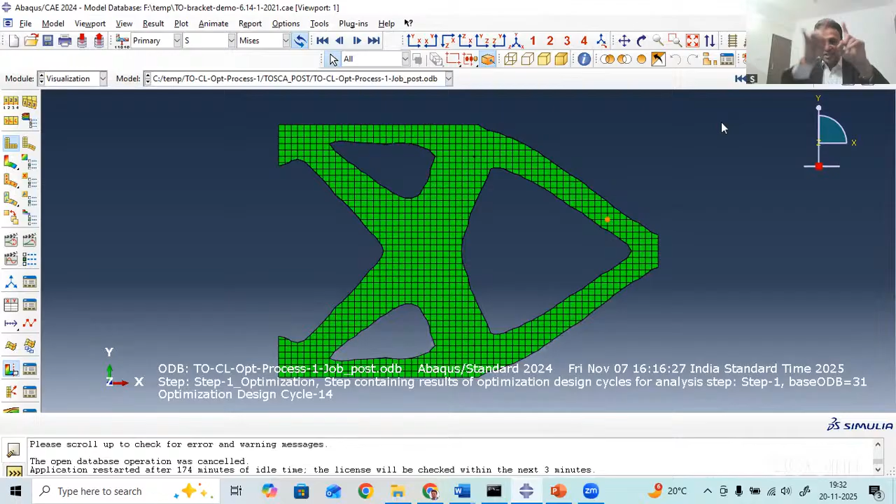You can see how the shape is converting over cycles. At the bottom, you see 14 cycles. So you initially started with a rectangle, but please see the shape now - every iteration it is becoming more stiffer and stiffer.

अभी मैं ये स्ट्रेस दिखा रहा हूं इसलिए ऐसे दिख रहा है। I should better show you Mat Prop Normalized. Mat Prop Normalized क्या याद है आपको? 1 और 0 के बीच में है। 1 means full, red means full solid।

लेट्स गो बैक अगेन। So I will start off with, you will start seeing Mat Prop Normalized का शेप। देखिए जो लाल लाल है ये कनेक्टिविटी बन रही है।

Can you see? So instead of having that full rectangle like cantilever, इसकी जगह you will have a 40% lightweight, 60% depending on the problem, and you will get a shape like this. That's your final thing. You start off with

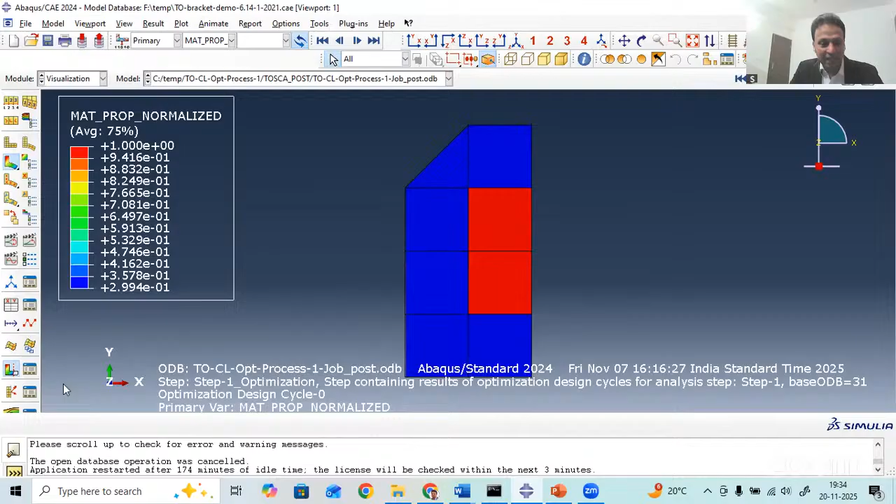zoom मुझे disturb यहाँ कर रहा। Okay, you start off with this, ये दिख रहा है, देखिए। If I show you, there was the load, this left end was fixed, and that's your last shape.

So I have superimposed original. The original is blue, the remaining is red. बात समझ में आ रही है? अगर मैं हटा दूं उसको ओरिजिनल को तो ये लाल शेप बच रहा है। And please remember, it will not fail.

So ladies and gentlemen, this was a quick demo of Abaqus also. I think time is already 7:34. Let me stop sharing, and I'll be more than happy to take any questions.

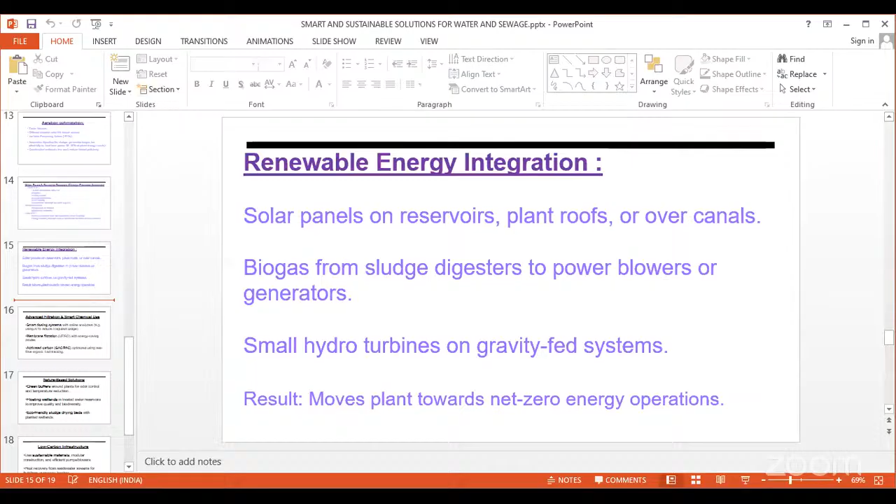So basically the clarificator works - its key process includes pre-treatment to remove suspended solids and demineralize the initial sediments, or you can say it screens the heavy particles out of the water, and it goes through the clarificator through the degasifier.

Now, the degasifier cleans and removes the dissolved oxygen.

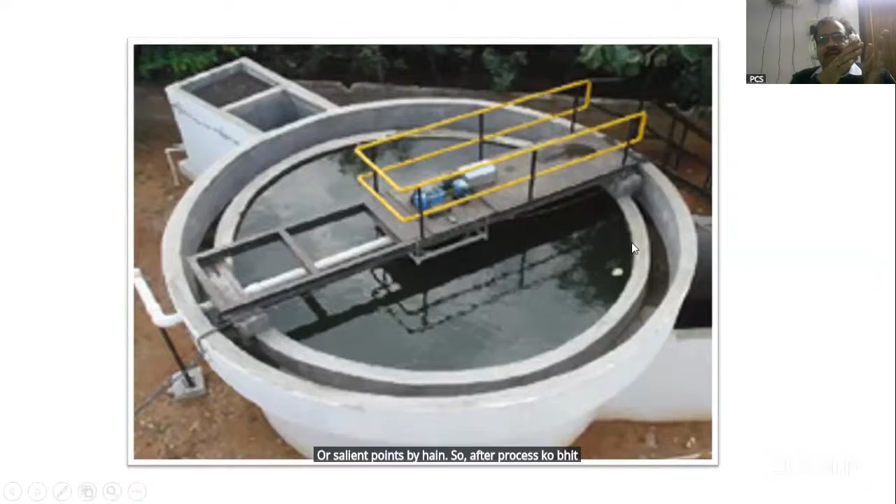If we talk about other water treatments, in cooling water treatment, water used in the cooling towers is treated with chemicals like scaling and corrosion inhibitors to prevent buildup and degradation of equipment. We are very much aware about the damages - we should avoid damage to boiler tubes as well as turbine blades, because it will affect the generation of electricity as well as the life of the boiler and turbine blades.

So after this circuit, wastewater treatment: after use, wastewater is treated to remove pollutants like heavy metals and suspended solids before it is discharged, in order to comply with environmental regulations.

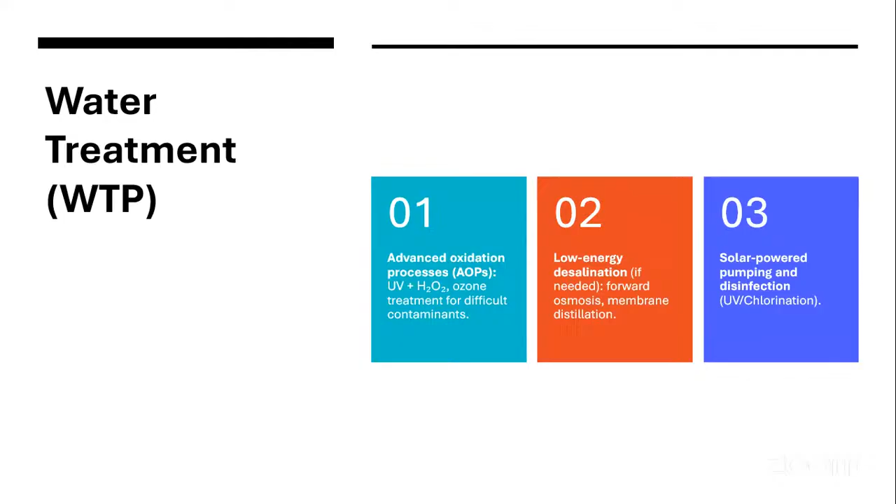Now advanced, sorry please pull back, advanced oxidation.

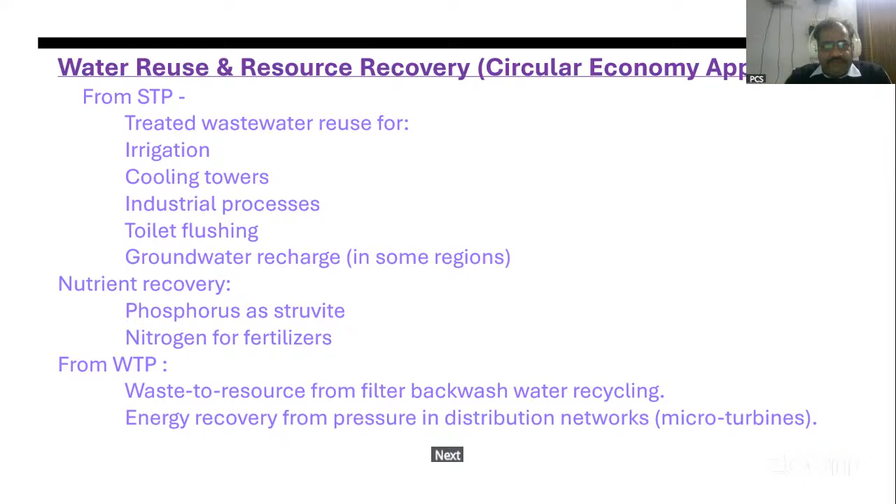Yes, renewable energy integration: solar panels on reservoirs, plant roofs or over canals.

Next, biogas from sludge digesters to power blowers or generators.

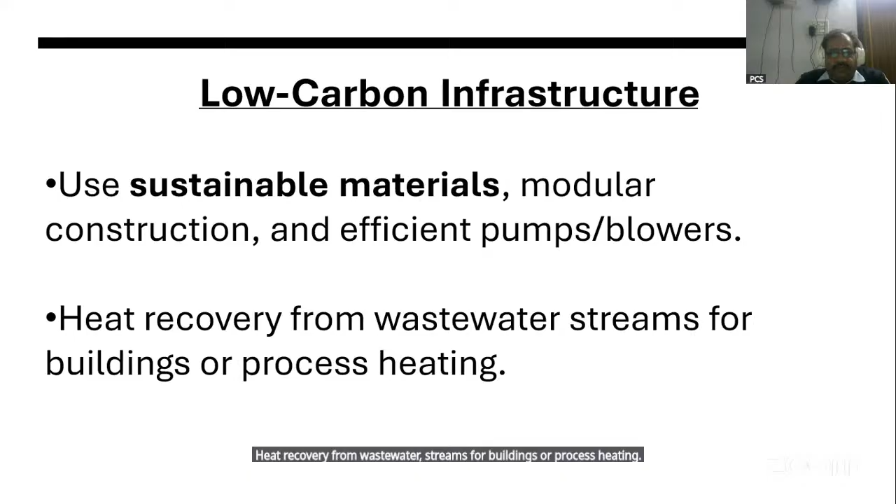smart management and community integration. Digital twins for plant simulation and optimization. Demand forecasting for water usage. Public dashboards for transparency and conservation awareness.

Thank you, sir, for the excellent session on the different types of problems related to power plants. Thank you. So, these are challenges. Yes, sir, challenges in power plants.